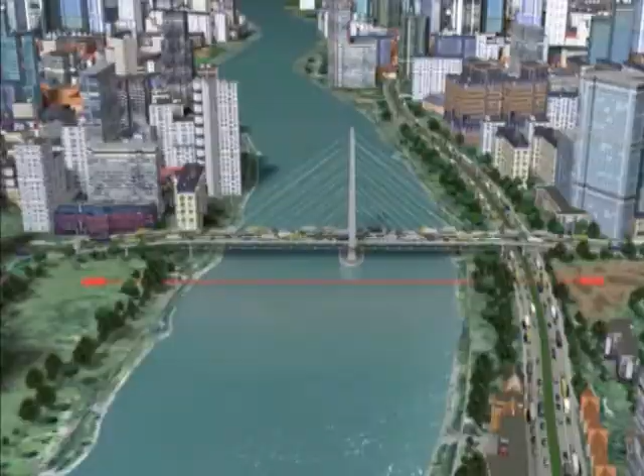In the computer simulation that follows, you will see the technical requirements from the planning phase through to completion of the pipeline. A pipeline with a diameter of 2 meters will be driven from the launch shaft to a target shaft 500 meters away.

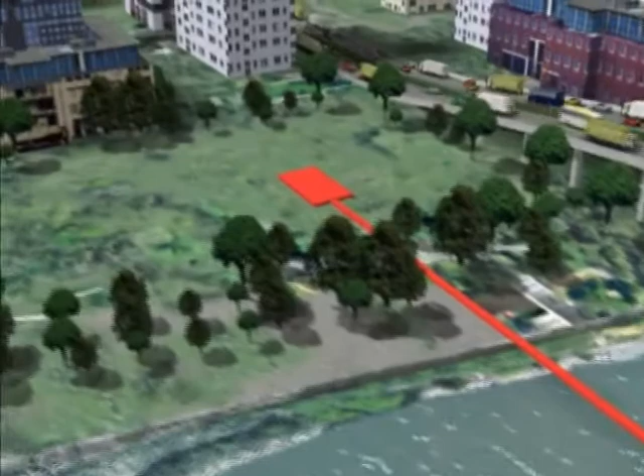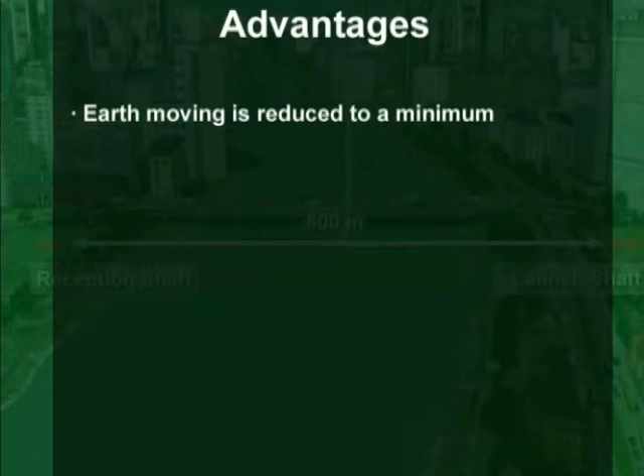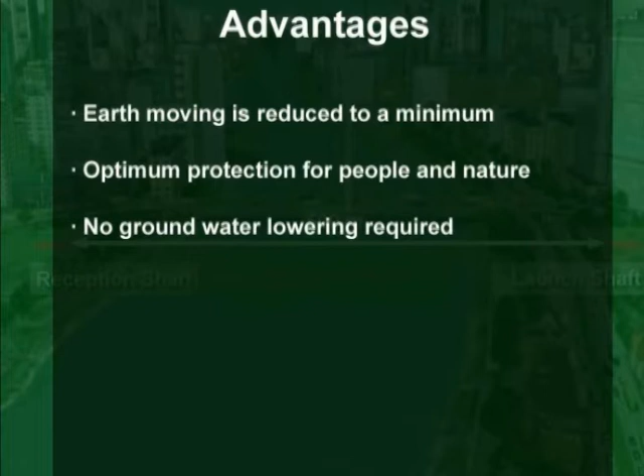The advantages of the pipe jacking and microtunneling process, in contrast to conventional methods in a construction project of this nature, are as follows. Drastic reduction in the movement of excavated soil minimizes costs. It's an environmentally friendly method that causes minimum disturbance along the construction routes other than at the working shafts. Lowering of the groundwater level is avoided, thus preventing dangerous settlements of building foundations and road surfaces.

There is virtually no disruption of the flow of traffic, apart from a slight disruption in the area of the job site. Traffic continues to flow without hindrance, highlighting the advantage over the conventional method of pipe laying in urban city areas. Last but not least, construction work is not influenced by the weather, resulting in more rapid completion and deadlines being met.

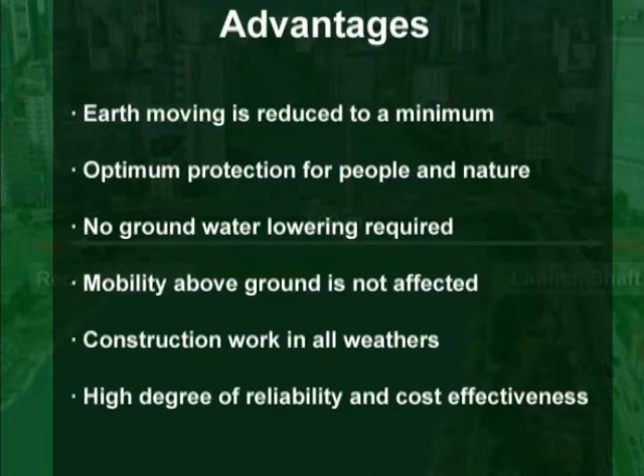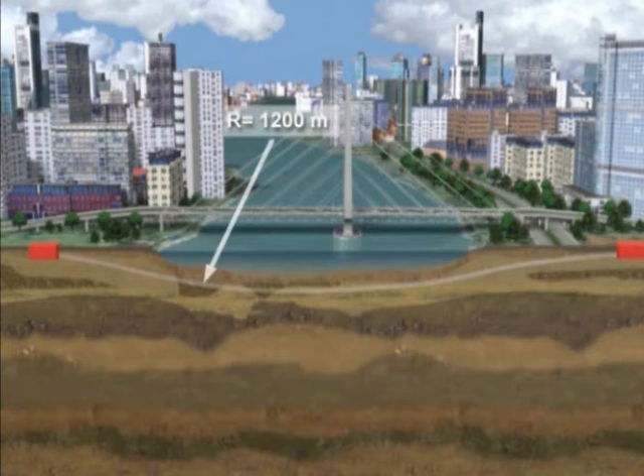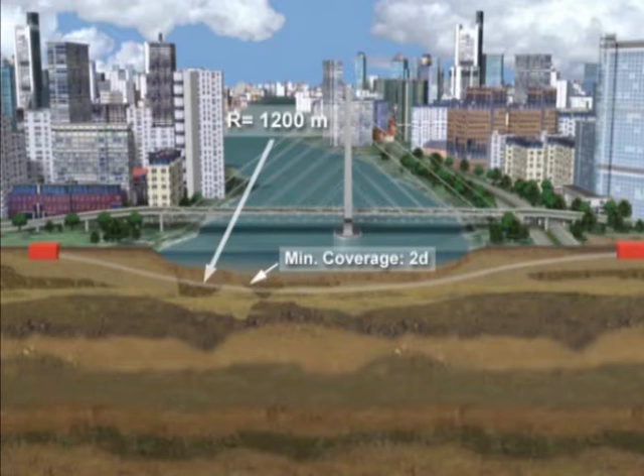A further advantage of pipe jacking and microtunneling is the opportunity to drive a curved alignment. The vertical curve radius, in this case 1200 meters, allows the riverbed to be tunneled under from a shallow working shaft. The minimum cover from the crown of the tunnel should not, however, be less than twice the external diameter of the pipeline. In this case, the base of the start and target shafts are located only about 8 meters below ground level, whereas the deepest point to be tunneled is 38 meters below ground level.

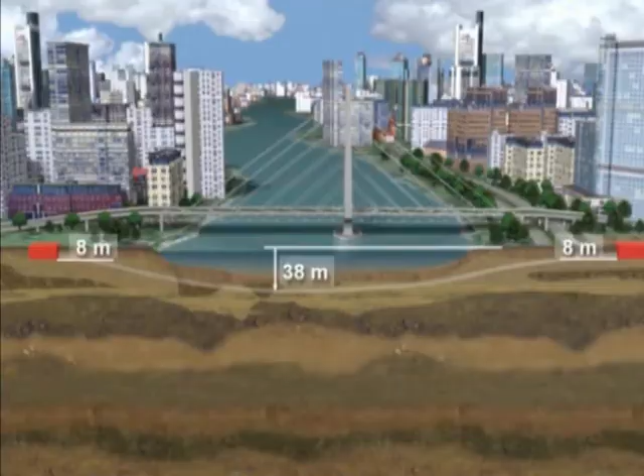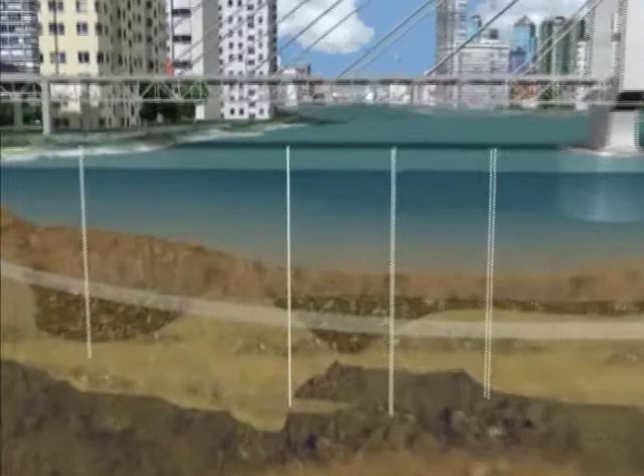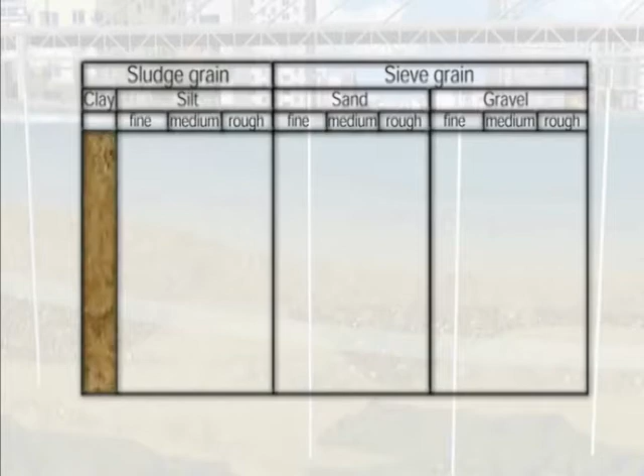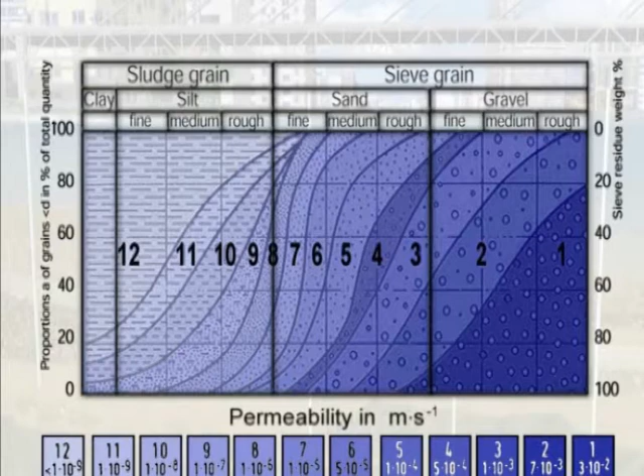In order to determine the geological conditions, boreholes are normally made along the planned route. As an example, we will now examine the borehole at the point of the tunnel with the least cover. The particle size distribution diagram classifies the material groups clay, silt, sand and gravel according to the grain size. As the grain size increases, the permeability of the soil increases with a subsequent increase in the water inflow. The areas best suited to slurry systems, as used with the AVN 2000, are marked by the green area.

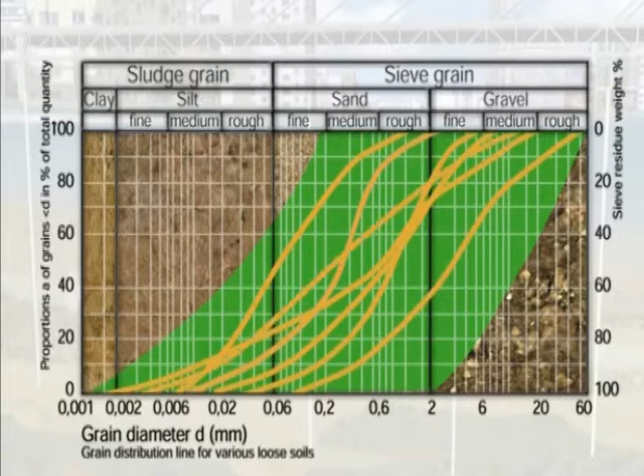Selected borehole material is passed through a series of sieves of varying sizes, the results being entered in this diagram called a grading curve. The evaluation of all boreholes along the route indicates the spectrum of grain size distribution that can be anticipated during tunneling. In this case, it lies within the area of operation designated as the suitable operating range.

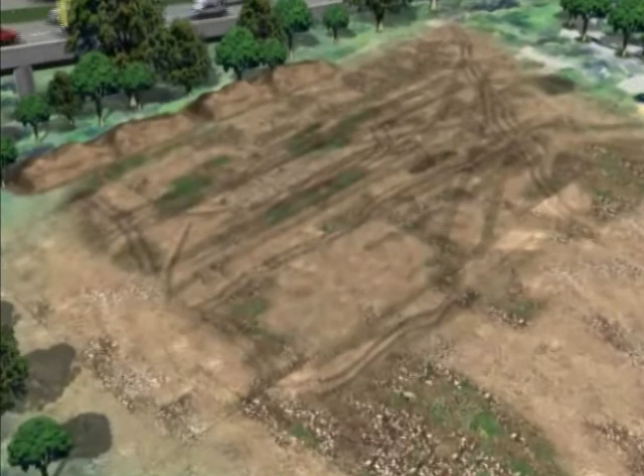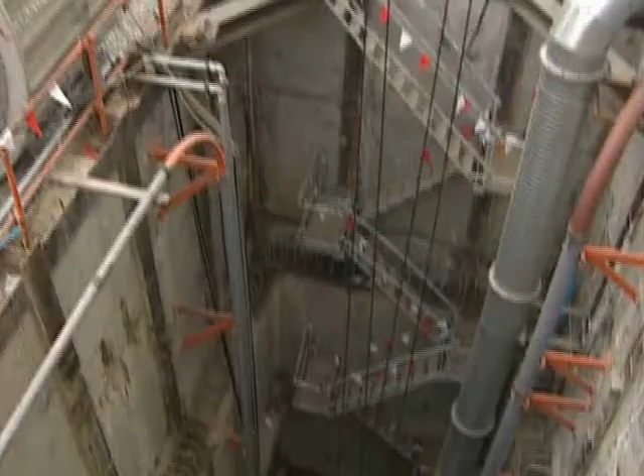The construction site at the start shaft is secured with coarse gravel and compacted to take the loads imposed by the crane, etc. Then the start shaft is constructed, in this case using the sheet piling method. It's also possible to construct the start and target shafts by other methods using, for example, precast concrete segments, in situ concrete shafts, etc. The start shaft must be adapted to the requirements and strengthened, if necessary, to be able to withstand the jacking forces.

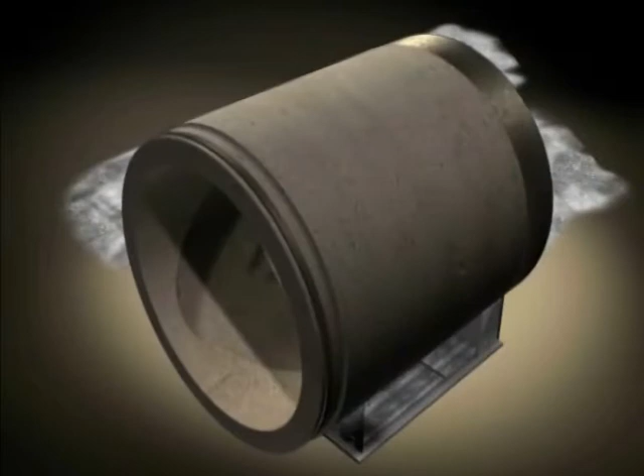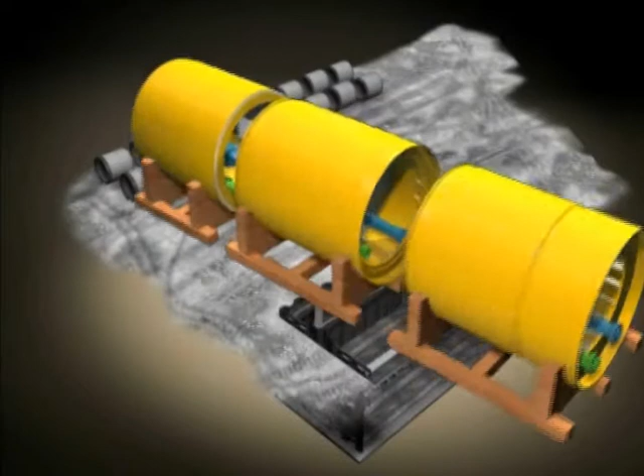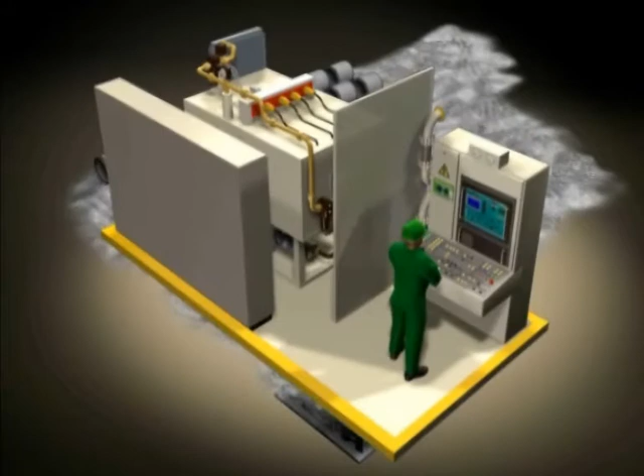The product pipes are normally delivered by truck and stored at the site. Dependent upon the availability of space, a pipe stock is established and maintained as necessary. The tunneling machine is delivered to the site in separate modules for easy handling. The container with the operator control panel and the hydraulic power pack for the jacking station is located in front of the start shaft, such that the machine operator has eye contact with the jacking station.

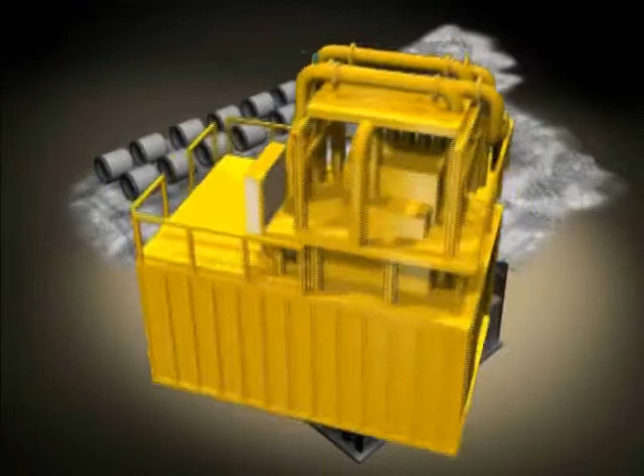A separation plant is used to separate the excavated material transported from the tunnel face by the slurry system. Bentonite suspension is used to support the working face and to convey the excavated material to the surface. After separation, the bentonite suspension is then recirculated to the tunnel face. A further bentonite pump is used to supply lubrication around the outside of the jacking pipes.

The speed-controlled slurry feed pump conveys the regenerated bentonite suspension from the separation plant to the cutter head. A speed-controlled slurry discharge pump is installed in the return side of the circuit. In order to prevent cavitation, it's set up in the start shaft and also connected in the separation container.

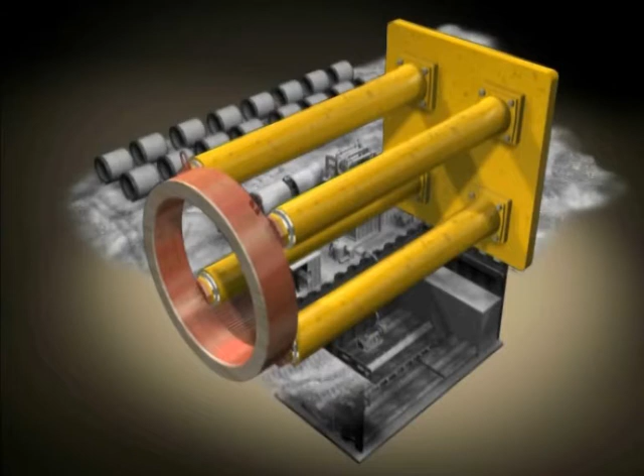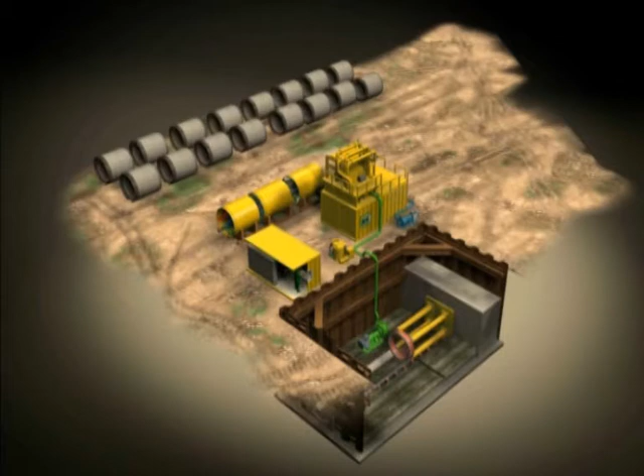The hydraulically powered main jacking station is installed in the start shaft. The thrust ring ensures that there is an even transfer of force from the 4 hydraulic cylinders. A concrete block cast in the rear of the start shaft absorbs the forces created by the thrust cylinders. The cutter head and the first machine pipe are assembled and can now be lowered into the start shaft by the site crane.

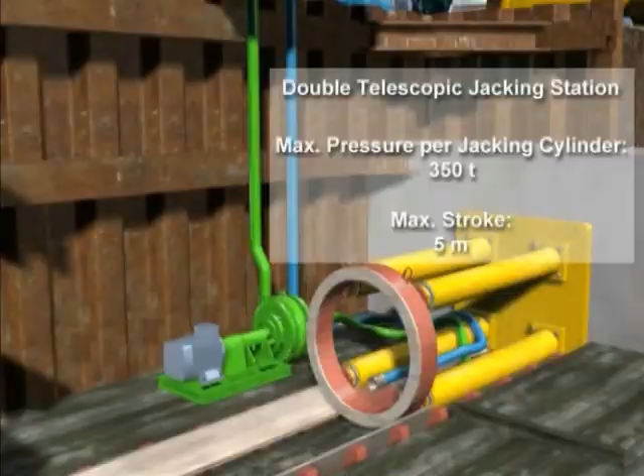The jacking station can generate a thrust force of up to 1,400 tons on the pipeline slide rails and provide precise positioning of the machine sections and the subsequent jacking pipes.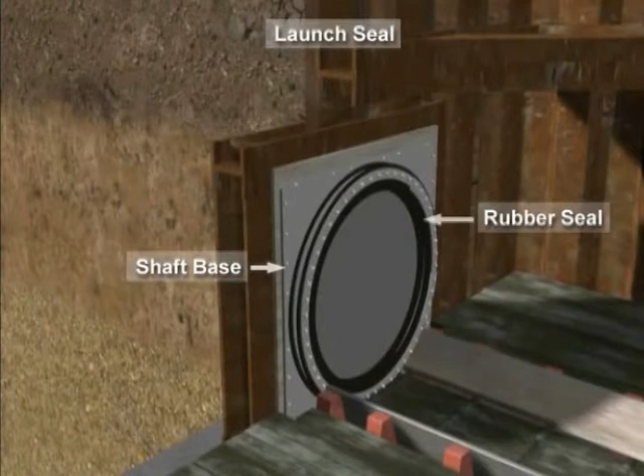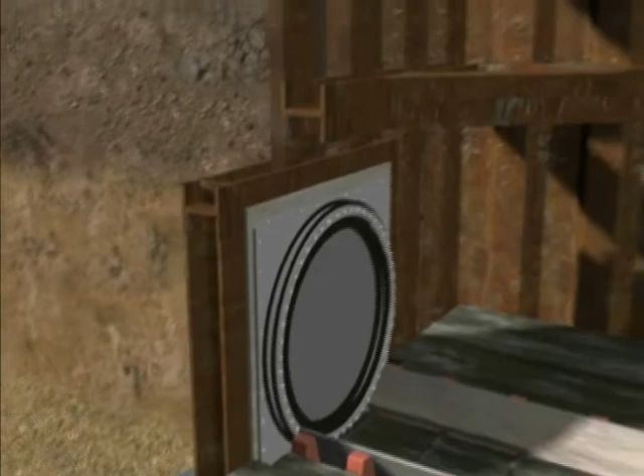A launch seal is necessary in order to ensure a watertight seal around the pipe and prevent the leakage of slurry and bentonite lubrication into the shaft. Normally, a low-strength concrete block is cast against the sheet pile wall at the exit point. The launch seal assembly is installed at this point by bolting to the concrete block.

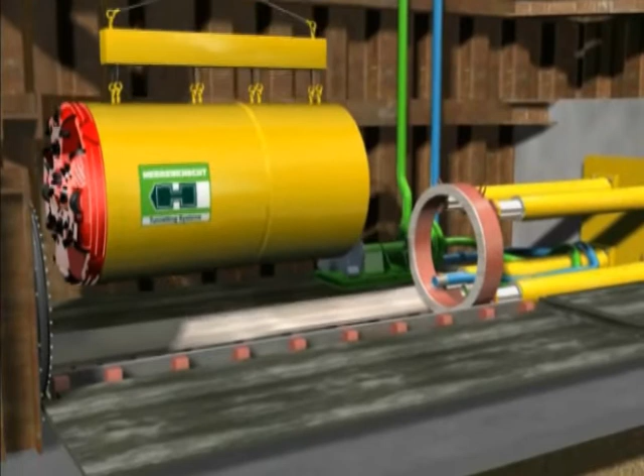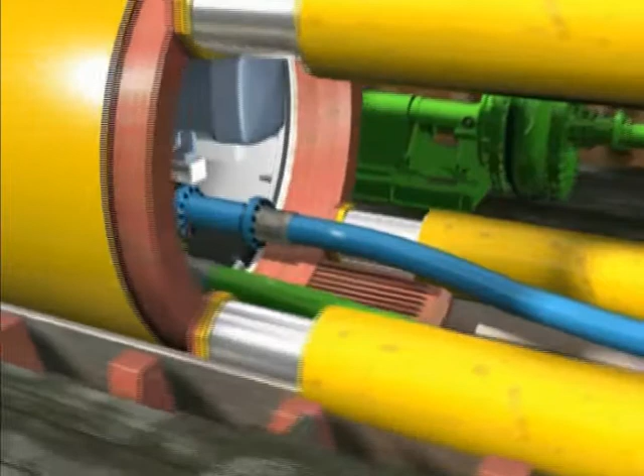Next, the cutter head and the first machine pipe, complete with the drive unit and steering cylinders, are lowered and positioned in front of the launch seal. The second machine pipe is lowered and connected to the first machine pipe. The feed and slurry discharge lines are connected. The tunneling machine now carefully cuts through the low-strength concrete block.

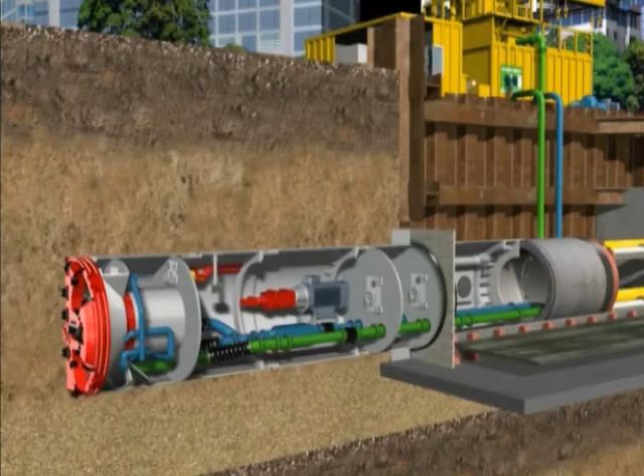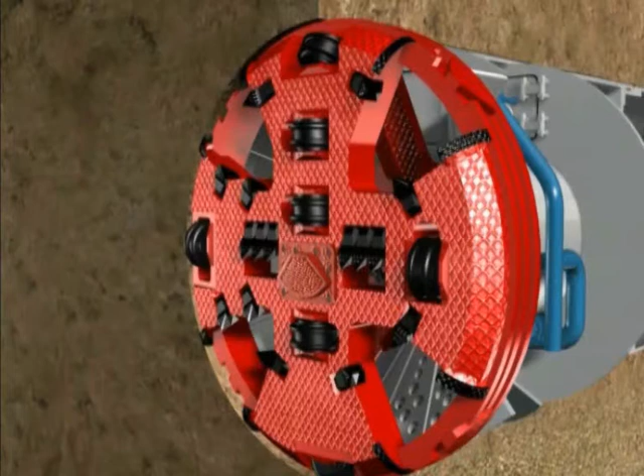After the last machine sections have been installed, the tunneling machine is complete and is now ready for the pipe jacking operation to commence. The cutter wheel and tools are adapted to the expected geological conditions. The crusher chamber is located directly behind the cutting wheel. During operation, the chamber is completely flooded with bentonite.

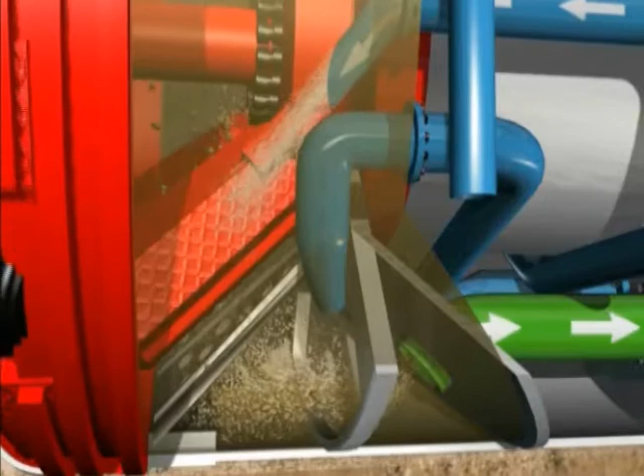The reinforced spokes of the wheel act as a grinding mechanism on the same principle as a coffee grinder. The larger rocks are reduced in size until they can pass through the opening of the screen for transport in the slurry circuit. The slurry discharge pipeline, shown in green, transports the excavated soil together with the bentonite suspension.

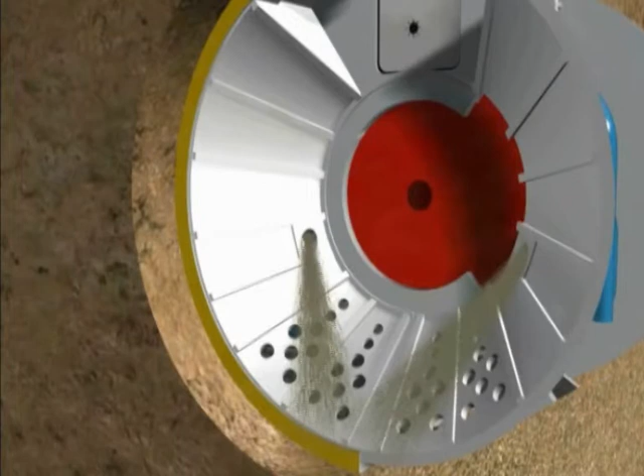During operation in hard rock or cohesive soil, the slurry circulation is led through the cutter head nozzles. In sandy soil, the slurry circulation is led through the annulus nozzles located behind the crusher cone in the excavation chamber.

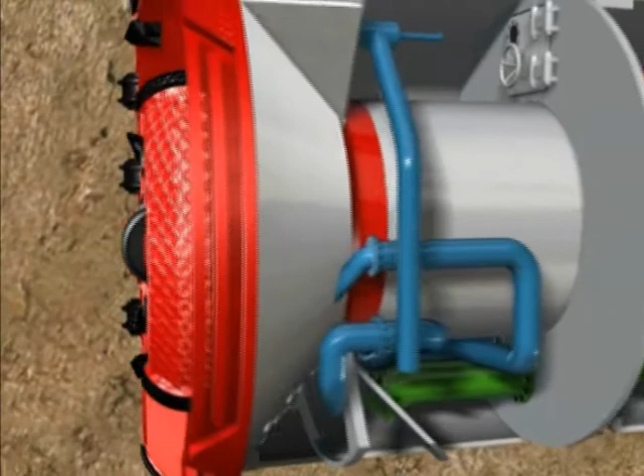In mixed shield mode, the chamber behind the crusher cone is flooded with bentonite. In this mode, pressure compensation with the crusher chamber takes place via the communication pipe. The slurry and feed lines run through this chamber.

The steering cylinders are situated in the first machine pipe and are used to adjust the direction of the cutter head with millimeter precision, thus making it possible to correct the line and level. In addition, a laser target is located in this machine pipe for determining the position of the machine. Power for the steering cylinders and cutting wheel drive is provided by the hydraulic power pack.

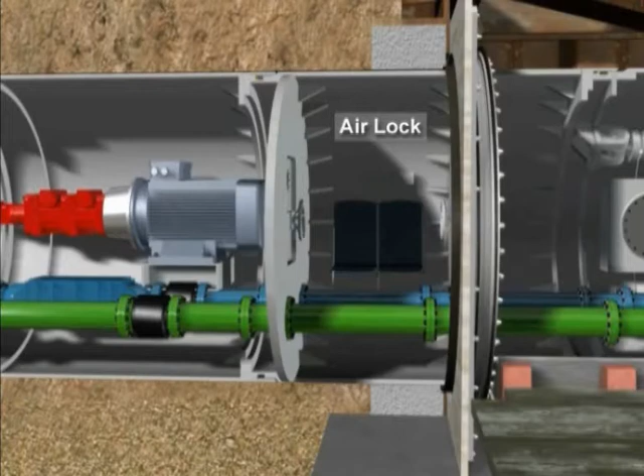The feed and slurry lines are equipped with compensators to block vibration movements and to realize a length compensation. A compressed airlock is located behind the first machine pipe. When it's necessary to make repairs or replace tools, the maintenance personnel are able to gain access to the cutting wheel and excavated face under the safety of compressed air.

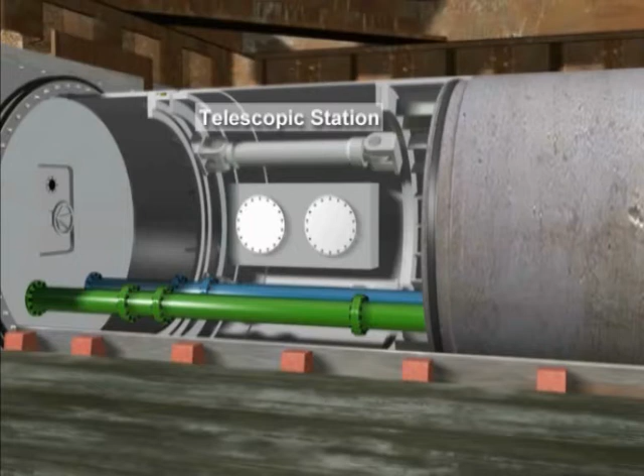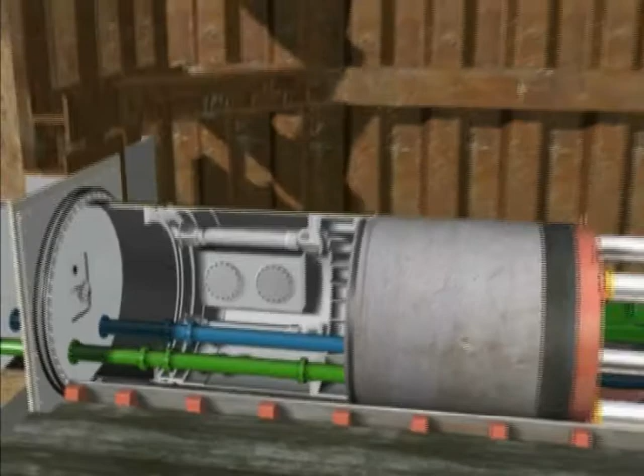Finally, a telescopic station is located at the rear of the machine. This provides constant thrust of the cutting wheel, particularly necessary in rock excavation, and ensures smooth advance of the machine. The slurry feed and discharge lines pass through the entire machine and along the tunnel to the separation plant.

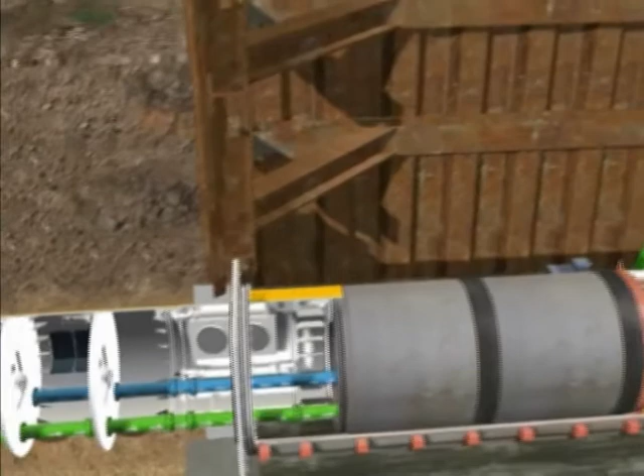The material transport system is a closed system. The blue lines feed the bentonite suspension to the excavation chamber, and the green discharge line transports the bentonite suspension and excavated material to the separation plant, where it's separated via vibrating screens and hydrocyclones.

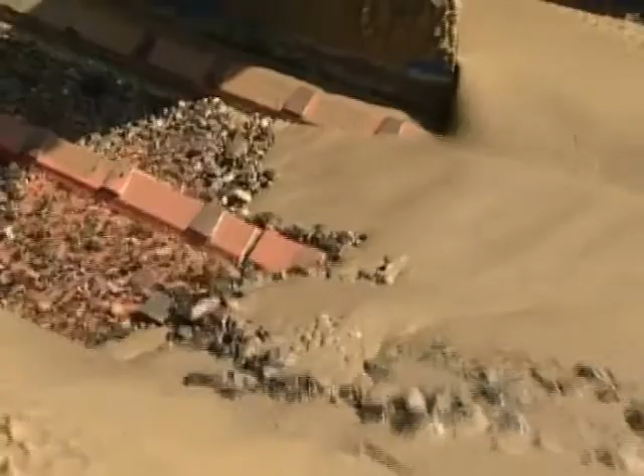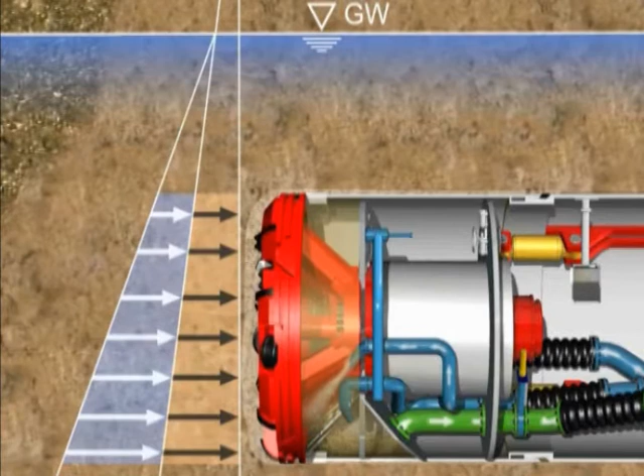In order to ensure that the tunneling is safe and controlled, the forces exerted at the working face have to be kept balanced. The earth pressure, shown in brown, and the water pressure, shown in blue, are counterbalanced by the machine with the pressure of the bentonite suspension in the excavation chamber. The bentonite suspension permeates the soil ahead by means of a light overpressure. The machine is in slurry mode with the cutting head nozzles in operation.

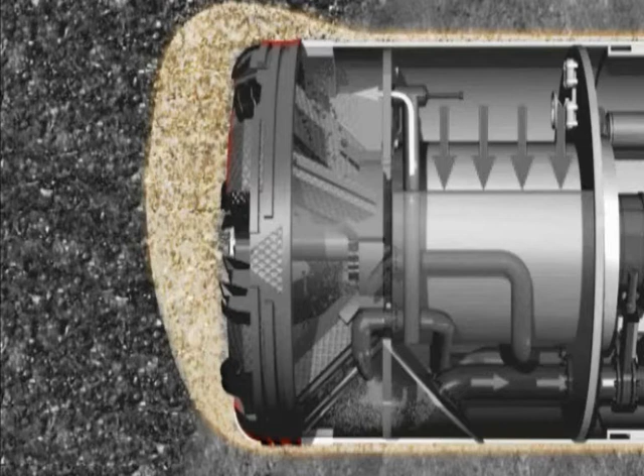When a coarse-grained gravel layer is reached, the machine can be changed to mixed shield mode, where it's possible to finely control the slurry pressure with the aid of compressed air and better build up a cake of bentonite at the face. This improves the support of the working face. The second chamber, which has been dry up to this point, is flooded for the changeover to mixed shield mode. Compensation for the pressure at the working face is achieved via the communication pipe.

The second chamber is subjected to air pressure. The pressure tends to fluctuate more heavily due to greater permeability of the coarse-grained size material and can be compensated via the compressed air cushion, which is used as a spring damper system. If there are high flow losses, more bentonite is pumped into the second chamber.

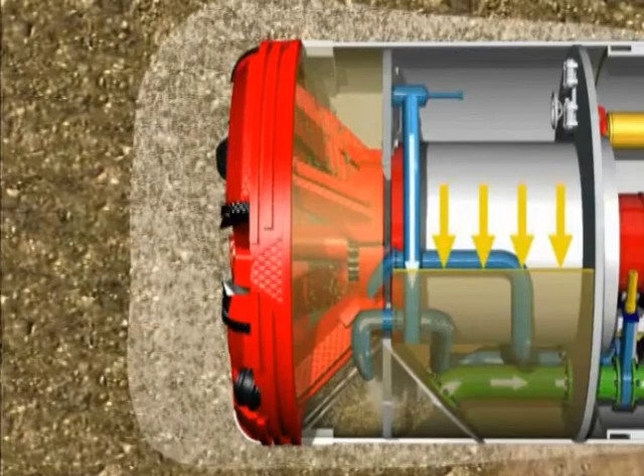Adaptation of the operating mode to the geological conditions means that it is possible to master a varied range of geological conditions. This technical advantage extends the range of operation for the AVN system.

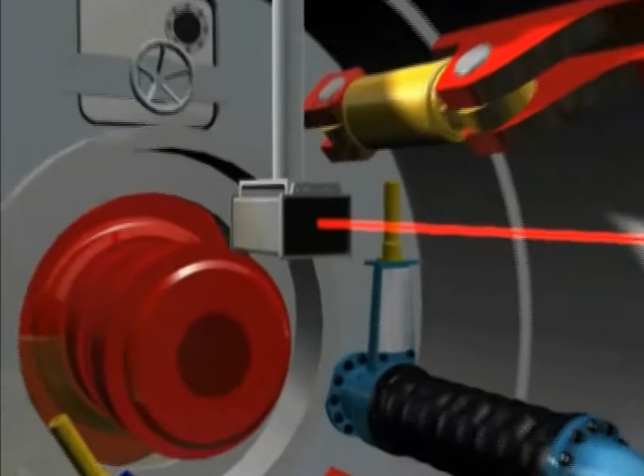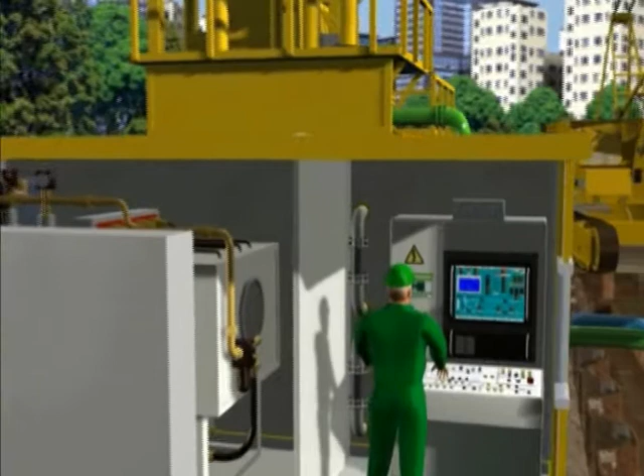The position of the tunneling machine is monitored with the assistance of a laser-supported measurement system. For level routes and lengths of up to 300 meters, an electronic laser system, ELS, is deployed. In this case, the laser is located in the start shaft and the target in the machine. The point at which the laser beam meets the laser target is determined electronically and is transferred via a data cable to the evaluation computer in the control panel. There, the measurement data is shown on the monitor in graphical and numerical format.

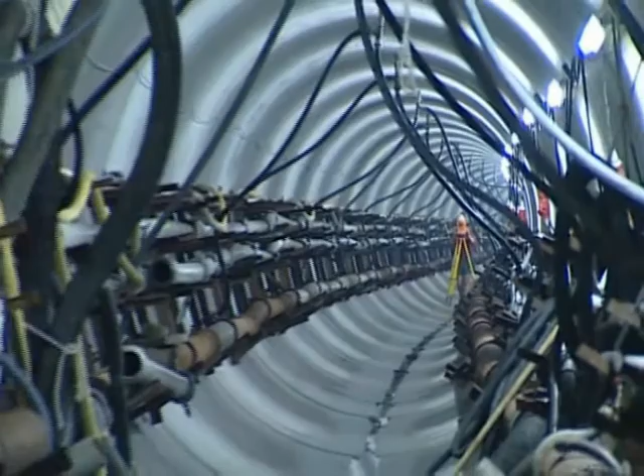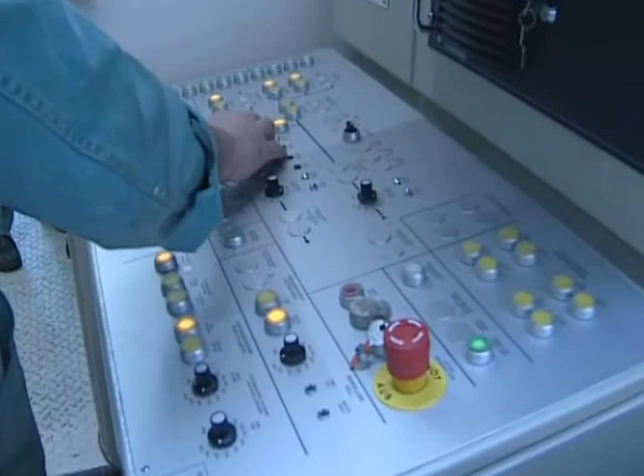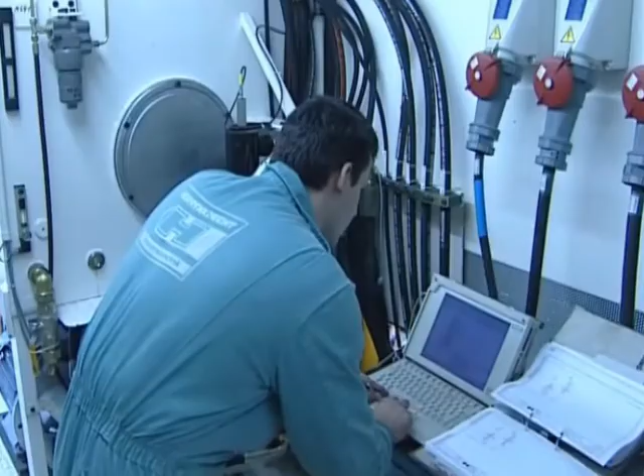On longer tunneling routes of more than 300 meters or curve drives, the so-called Steuer Light System SLS-RV guidance system continuously provides the shield operator with updated information about the location and direction of the machine. On the basis of this design, it's possible to steer both horizontal and vertical curves. Following the startup phase, the component parts of the survey system are installed in the forward area of the tunnel and move forward with the pipe jacking without eye contact to the launch shaft.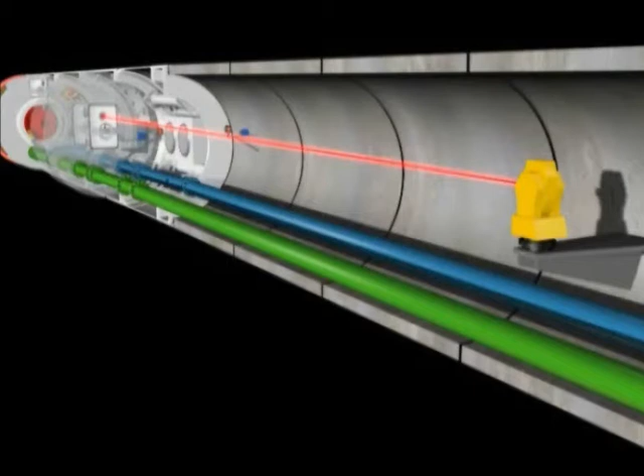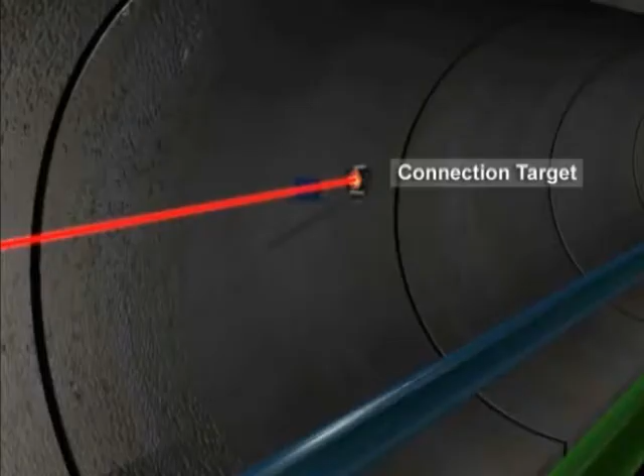In the pipeline, the servo motor-powered laser theodolite is adapted to an automated tripod. There's an active laser target in the TBM, which acts as the receiving unit for the laser beam, as well as a simple prism for measuring routes. In the pipeline, there are 3 measurement prisms. 1 is used as the connection target and 2 as reference prisms for the automatic measurements of the tunnel alignment. In order to record any effects of roll of the tunneling machine or pipeline, these are equipped with single-axis inclinometers.

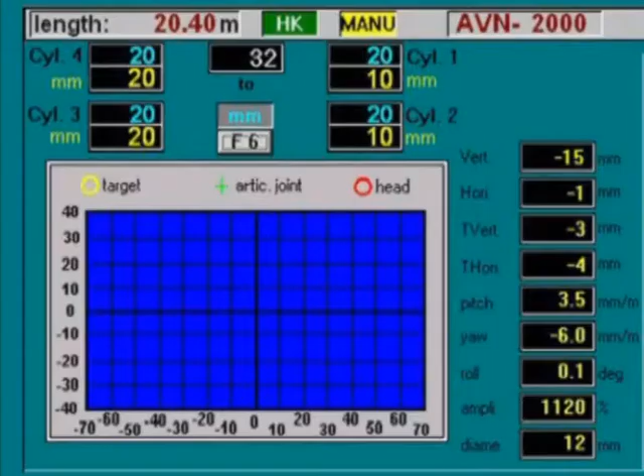Presentation of the spatial position of the machine is made by means of a white crosshair and a red crosshair, that is, position of the machine in cutter head level. The set value of the machine position is shown by means of a green crosshair.

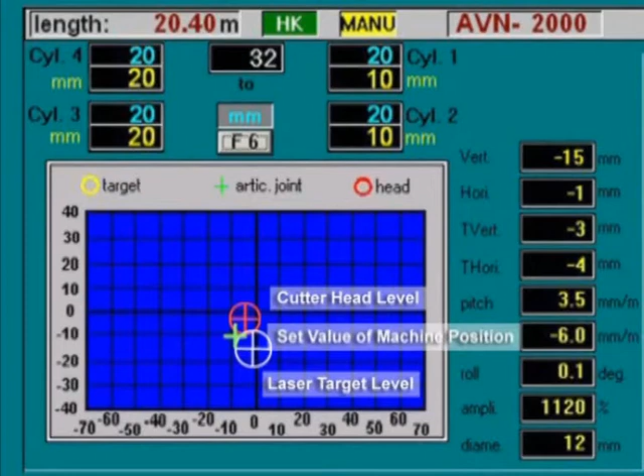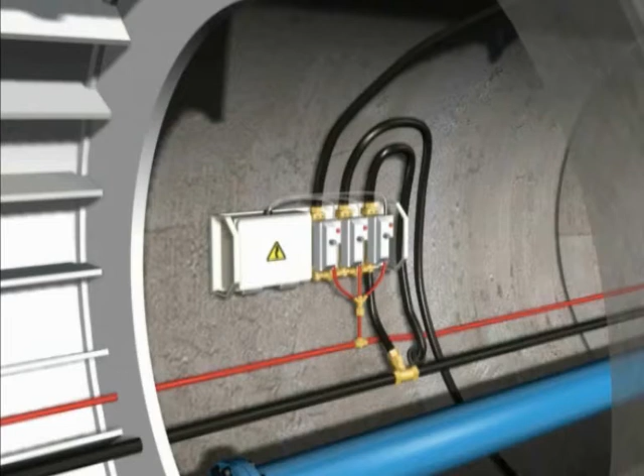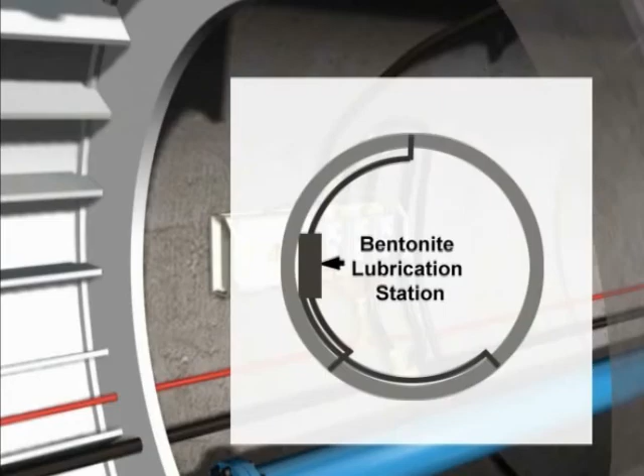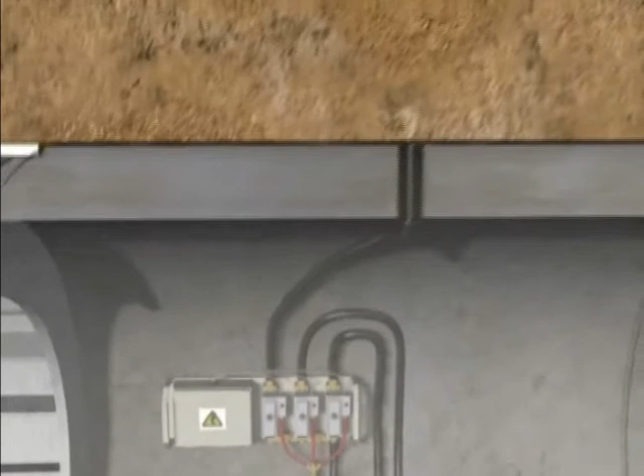During tunneling, the friction forces around the outside of the jacking pipes have to be kept as low as possible. The normal method of doing this is to lubricate the annulus around the jacking pipes by injecting bentonite. Every 3rd to 5th jacking pipe is equipped with a bentonite lubrication station. These pipes each have 3 injection points that are connected to the bentonite lines. The solenoid-operated valve at each point enables controlled, metered injection. The bentonite is injected with light pressure into the annular gap between the pipe and the ground and spreads over the surface of the pipe. It permeates the surrounding soil, providing a considerable reduction in friction.

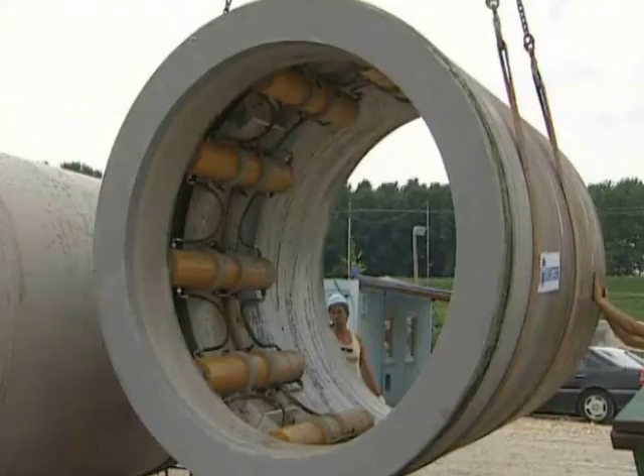A further measure aimed at keeping the jacking forces of the tunnel under construction at an acceptable level is the deployment of additional jacking stations. The so-called intermediate jacking station consists of a steel shell with the hydraulic cylinders installed. For demonstration purposes, an intermediate jacking station located directly behind the main jacking station is used here to clarify the principle. In reality, an intermediate jacking station would be deployed at a distance of roughly 100 to 150 meters behind the tunneling machine. The jacking force of the main jacking station is then only effective up to the first intermediate jacking station.

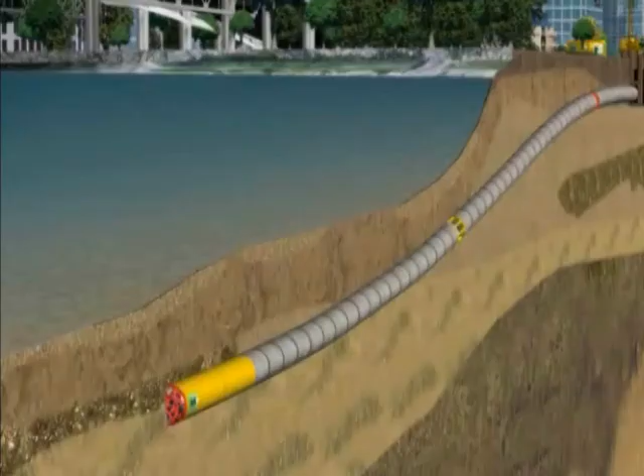When the main jacks are extended, those in the intermediate jacking station are retracted. Afterwards, the main jack is locked in its position and then serves as a thrust block. The intermediate jacking station braces against the section of the pipeline behind it and pushes the part in front of it further forwards. Loadings along the pipeline are thus maintained at minimum levels. In this way, a number of intermediate jacking stations situated one behind the other make even long-distance tunneling possible. With the aid of bentonite lubrication and intermediate jacking stations, the whole route can be advanced without intermediate shafts.

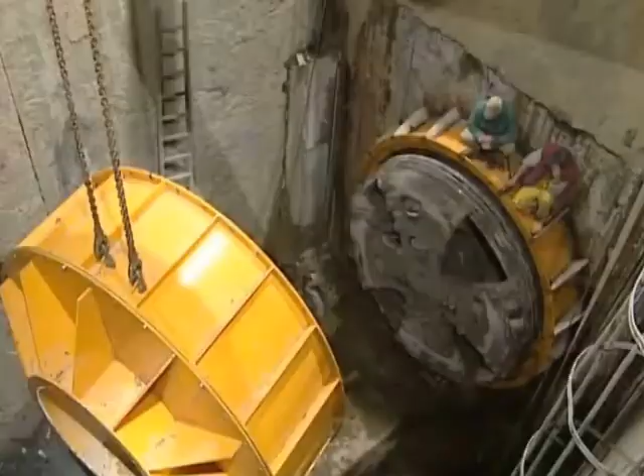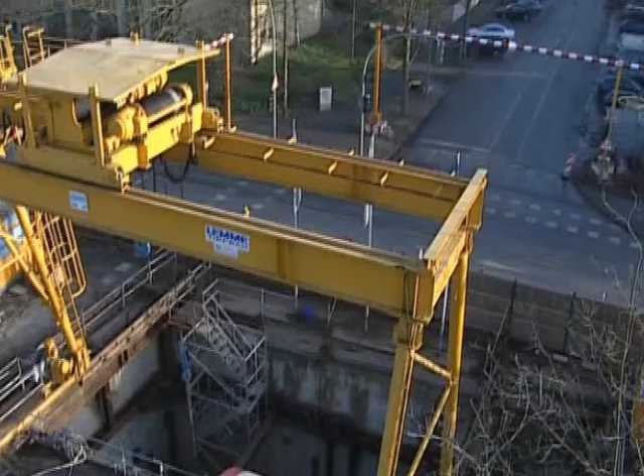In the target shaft, the machine is disassembled and removed. After completion of pipe jacking, the manholes are finished and the new pipeline can go into operation. In this animation, some Herrenknecht innovations in the area of long-distance pipe jacking have been illustrated. These developments result in a reduction of the overall construction time required for long-distance tunneling in order to make construction more cost-efficient and to avoid possible complications.